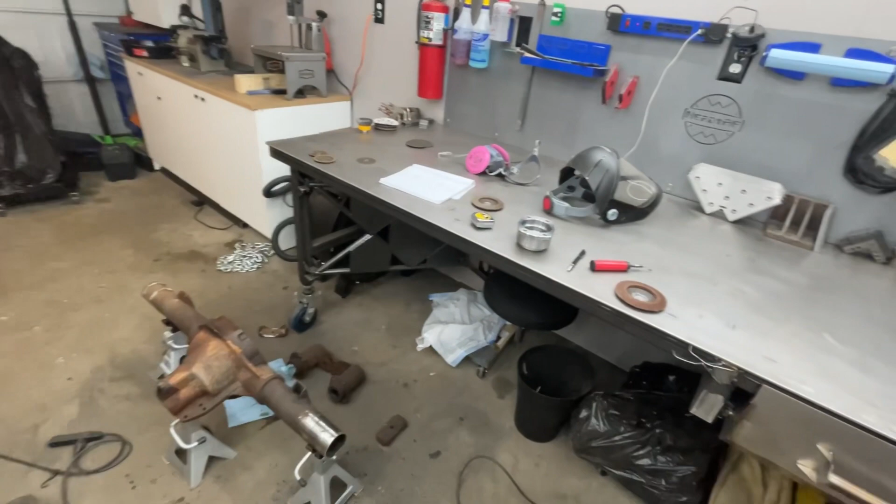Episode 18 here, and we got some cutting, grinding, and more cutting on a dirty, rusty, old rear axle. I got my Ford 8.8 right here. It's in shambles. I got my housing ends, and I also placed the order for my Tin Soldier small tire 4-link brackets, so we can get this rear end built. Really, once I'm done cutting and getting everything straight, I get the brackets on, weld it together, it's ready to rock. Then I just got to order the spool and some axles to stick in it, and I can get it sitting in the car.

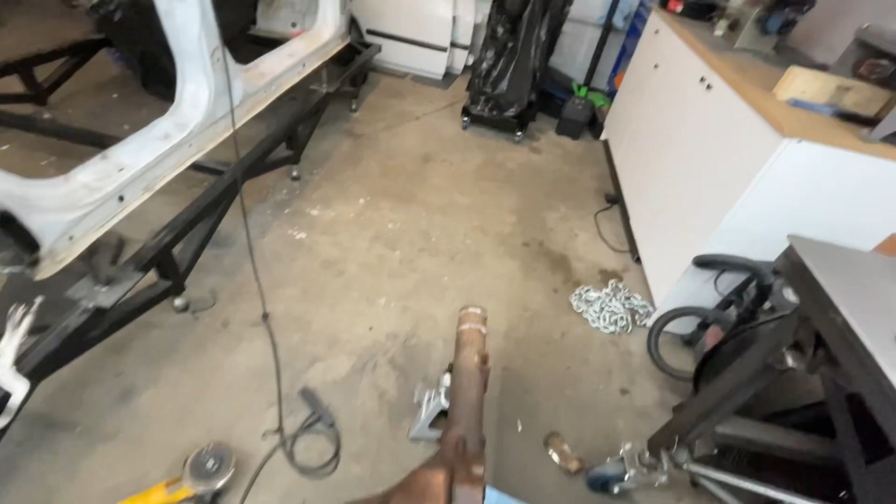So I want to give a breakdown of what I did. In the car, I had put both tires where I wanted them, spaced from side to side. I was pretty happy with it, but I ended up deciding to favor tucking them under the car some more, going up underneath the car. As much as it pains me to do that, because it won't look as good as something super flush, I think in the long run it will be better.

There's also a couple benefits from it. One being that it makes the axle actually a little bit lighter, because there's a lot of metal when you account for the tube and the axle. It's making it just a teeny bit lighter. It also makes it so much easier to get the wheels and tires off. Being a drag and drive car, doing maintenance, pulling the wheels and tires off and putting street tires on is something I'll be doing. During a drag and drive event, you're doing it multiple times, at least twice a day, when you get there and when you leave. And driving it on the street at home, I'll be doing the same thing, putting miles on it and having fun. So I decided to favor tucking it up underneath the car.

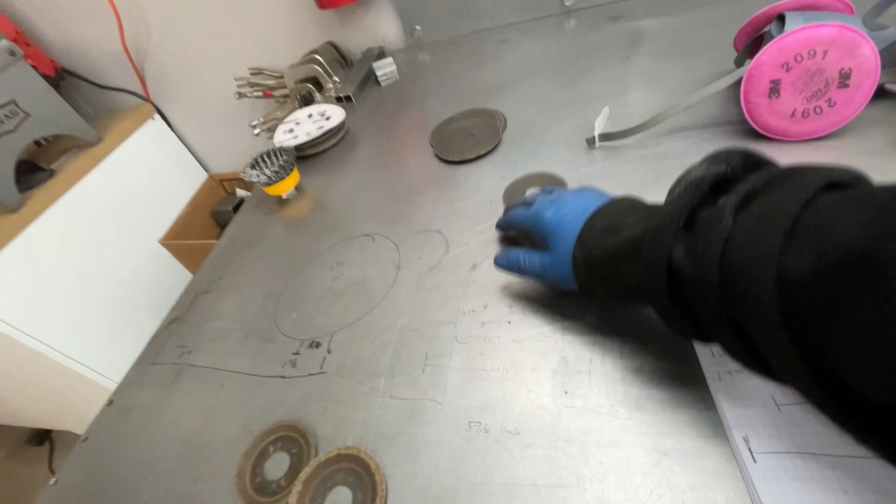I took all those measurements and made sure they were the same number. If you measure at 4 points on the wheel across to the other wheel, all four numbers should be the same distance, which tells you the wheels are perfectly parallel with no twist or turn. I was happy where they were spaced. I took a measurement from the inside of the hub to the inside of the hub on those two wheels—they're 5.5-inch backspace wheels. Taking that measurement inside to inside, I ended up deciding to go with a 40-inch axle, from hub to hub. So just to give you a breakdown of what I've got going on here, it's a 40-inch axle.

This was the rough distance between the two tires. So I got roughly 30.5 inches between the two tires, and then from hub to hub was 40 inches.

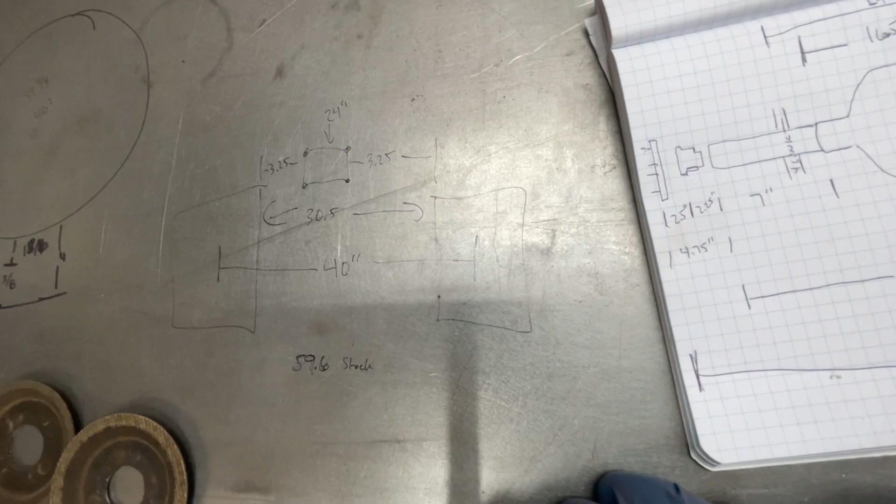Then I knew I was going to have to cut a ton off this thing. I think stock was like 59 or 56 inches, so it was a ton. I knew I was cutting a minimum of like 18 inches off this thing.

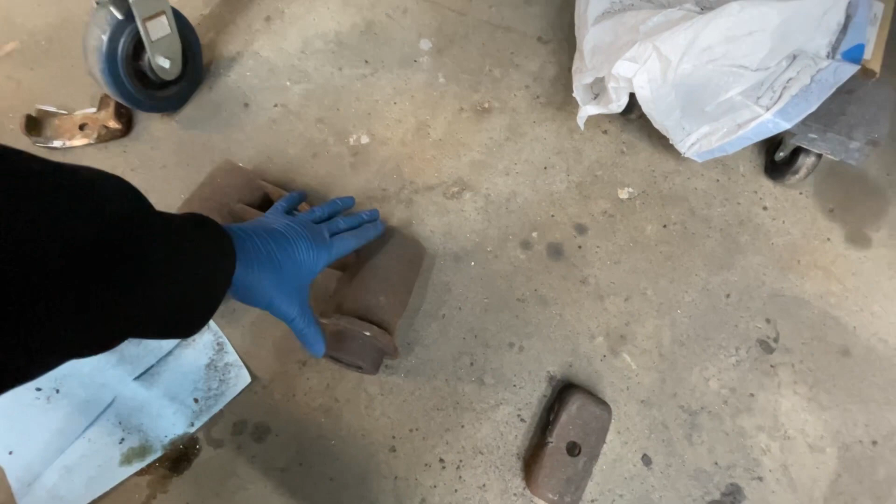What I decided to do is pick a spot just past these shock brackets, which is only like a 6-inch piece, maybe 7 inches tops. So I just whacked it off there, so it's less metal I have to clean. Then I started digging at it, cutting these brackets off. I cut both those brackets off and ground this one.

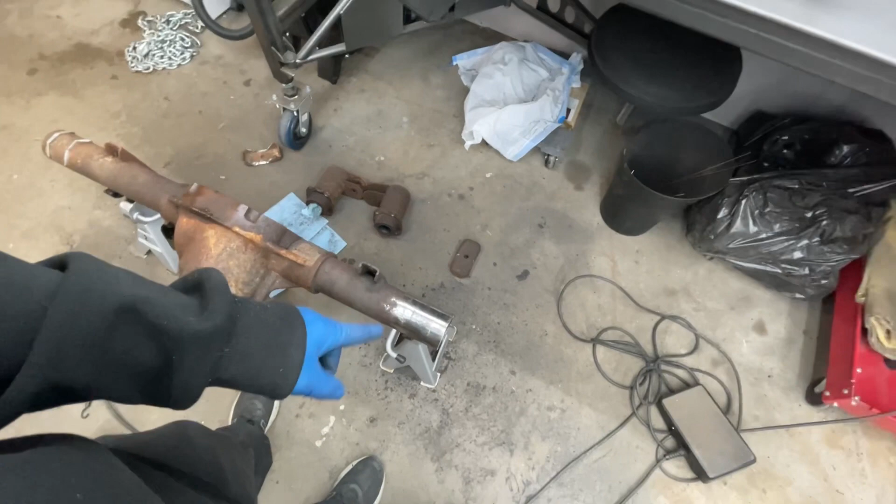And then I was sitting there looking at it and thought I should probably measure this thing, because I may be doing a lot of cutting and grinding for no reason at all. And that's exactly what I ended up doing. So I took some measurements.

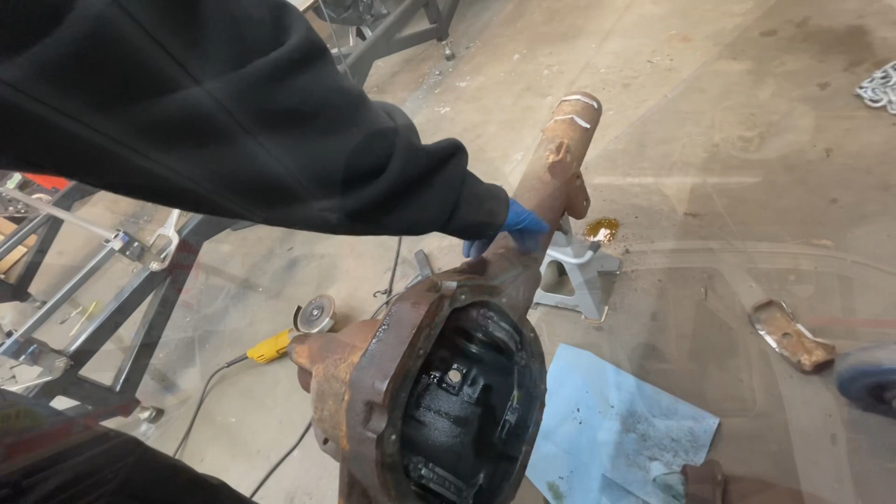From this cast area to this cast area, basically the full width of the center section, not the tube. So up against this shoulder to up against this shoulder. It should be a relatively centered spot on the housing.

What you can do too is measure from the cap to the outside, and then this cap to the outside, to kind of make sure the diff is going to be square in there. But that doesn't necessarily mean exactly where the diff's going to be either. So really you're just looking for a reference point to measure off of tube length wise. So going from here to here, that gives you a good spot to measure out to here.

So I always measure on the same plane. When I go to mark this axle, I'll measure it at the same spot up here out this way, just in case there's some weird casting shift - I wouldn't measure from over here, I measure in the same spot out to here. And obviously before I cut, I would measure from here all the way across to the other side. That's how I go about figuring out how long the tubes need to be.

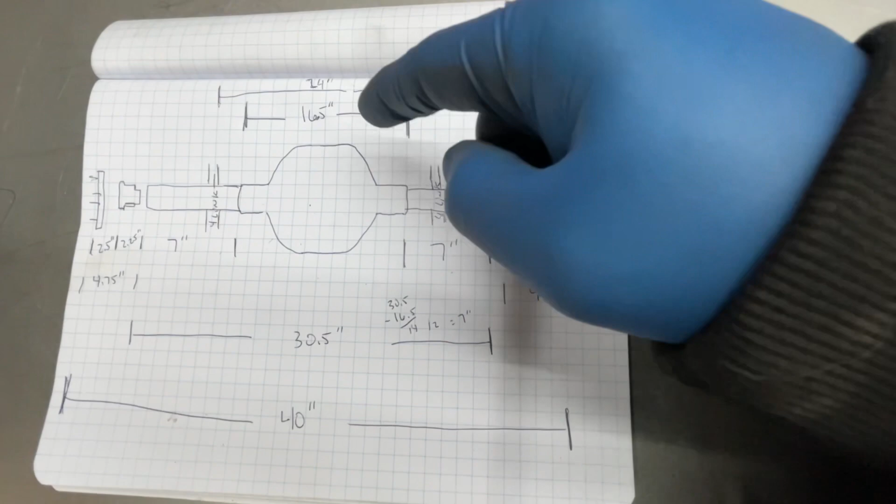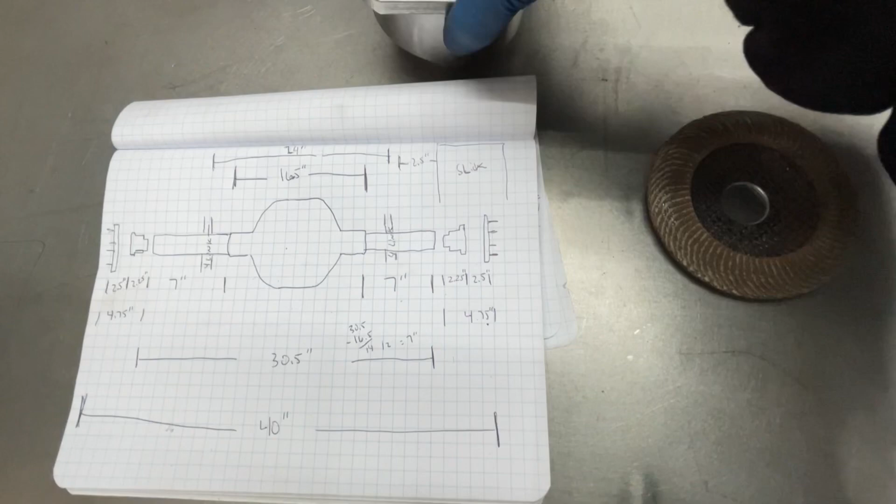So I measured 16.5 inches on the housing length. Then, from the axle flange, where your wheel bolts up, to the front of this - so from where the wheel bolts up to the front of this - the standard for these axles is 2.5 inches. I think most 9 inches and most 8.8s are 2.5 inches.

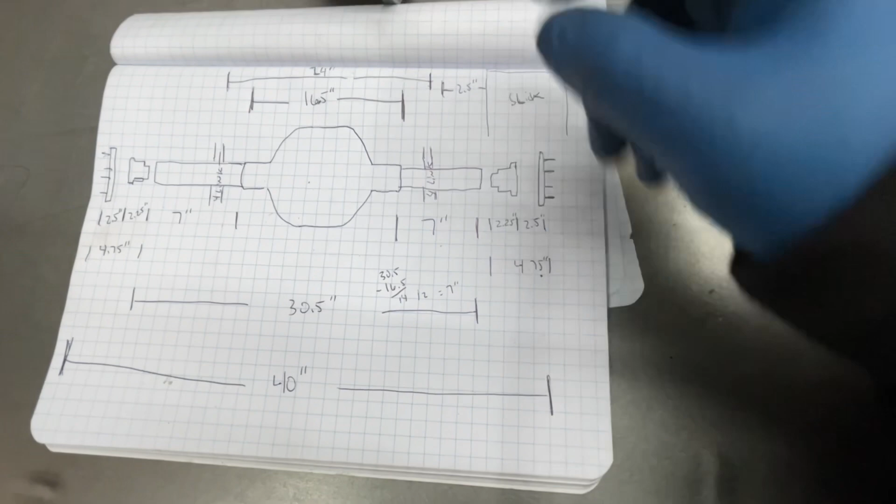So when you buy aftermarket axles, everybody pretty much sells them at 2.5 inches. So that's 2.5 inches. And then I stuck this in there to see exactly where it sat, and gave a measurement from here to the axle tube. So from this outside flange where my thumb is to the axle tube, because the chamfer itself kind of sticks on the inside there. I took that measurement - that was 2.25.

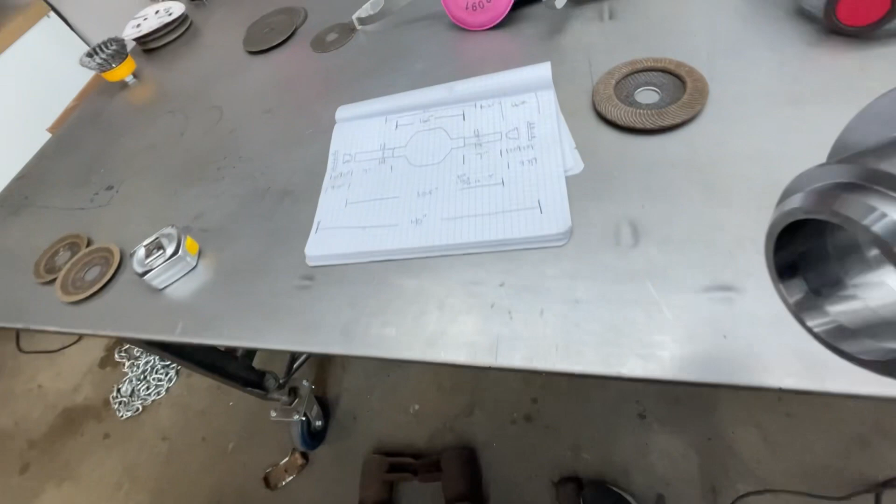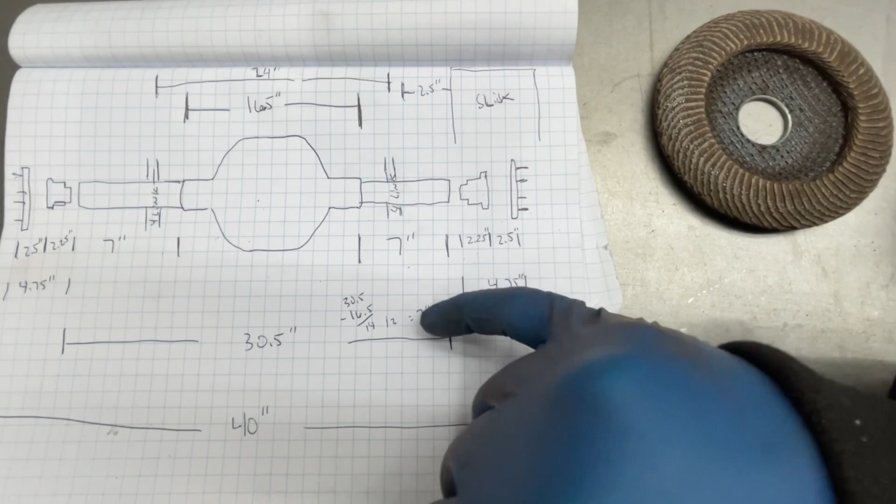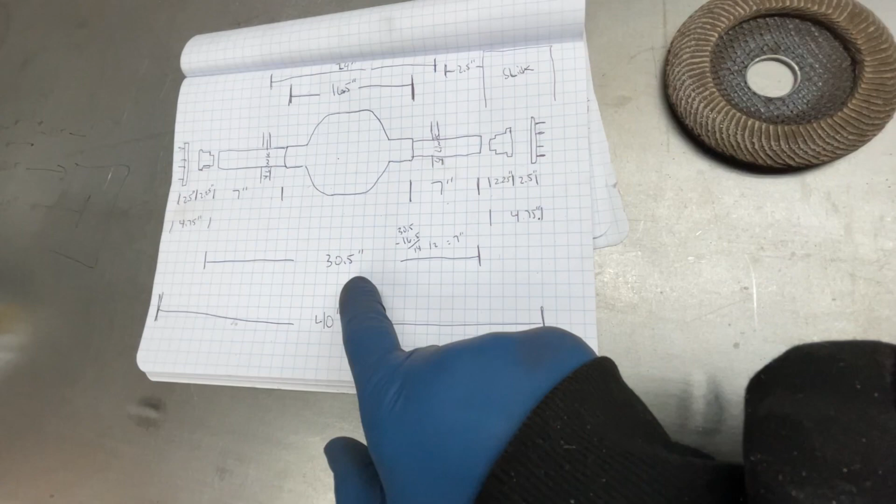All right, so after some back mathing: 2.5 plus 2.25 is 4.75, times 2, subtract it from my 40 inches overall, and that gives me 30.5. Then you take that 30.5, subtract the 16.5, gets 14 inches, divide that by 2, and that gives you 7-inch tubes on each side. So if I was to mark 7-inch tubes and measure it, I should get 30.5. And then I know if I add this and this to it, it would give me my 40 inches.

So that is how I know exactly where I'm going to cut. And that is why I messed up and wasted a bunch of time by grinding these, because if you measure 7 inches, I didn't need to grind those. I could have just cut it. Oh well, so the last hour or more of me grinding, I didn't need to do.

That's why you always measure certain things first. Sometimes you can cut it off and it's just less you have to clean up, less you'll have to grind. I should have known better that I was probably going to cut more off than the 6-7 inches I already did, but I just got a little rambunctious with cutting brackets off and cleaning it up.

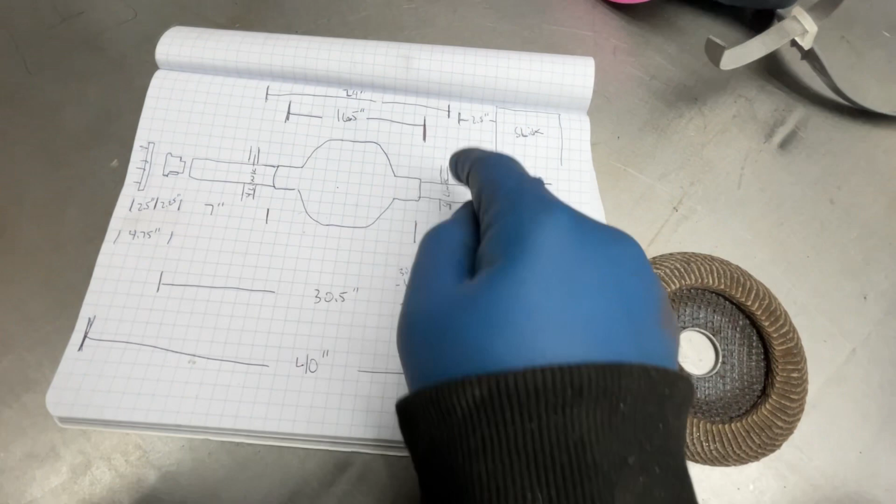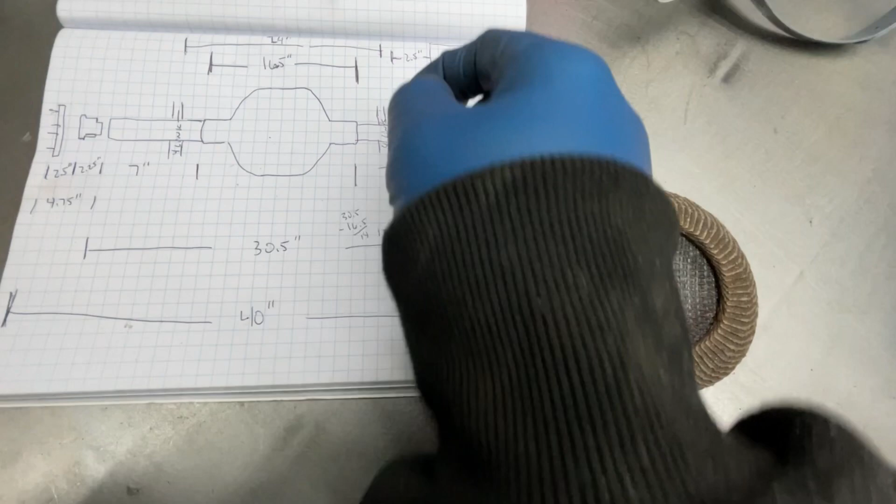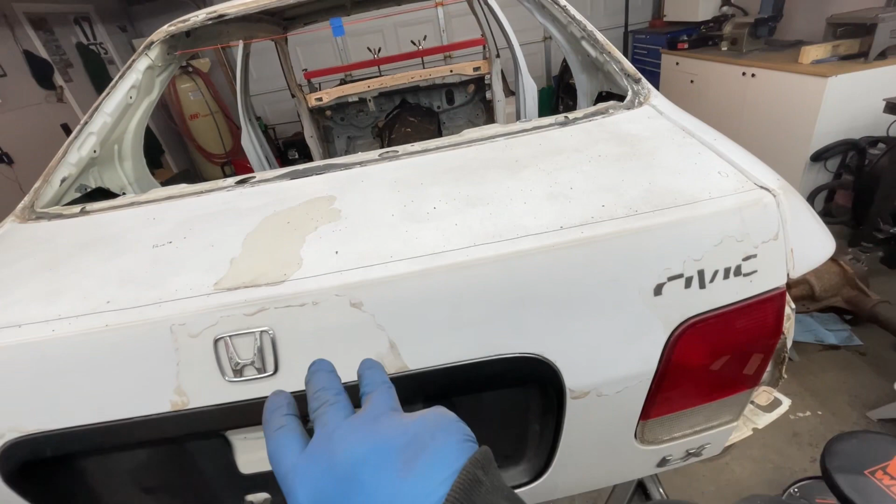It happens. Another thing I did, I know I'm going to do a 24-inch rear section, so my 4-link bars are going to be at 24 inches on center. So the distance between my 4-link bars, center to center, is going to be 24 inches. That way the shocks and the shock tab will be right in the center of that upper bar, because the shock tab will come off of the rear structure on the back of the car. Oh, I got the trunk on. So I'll have the rear structure that comes back over the axle, and the center of those two bars is where the shock will bolt and then go down to the 4 links. So everything will be 24 inches on center.

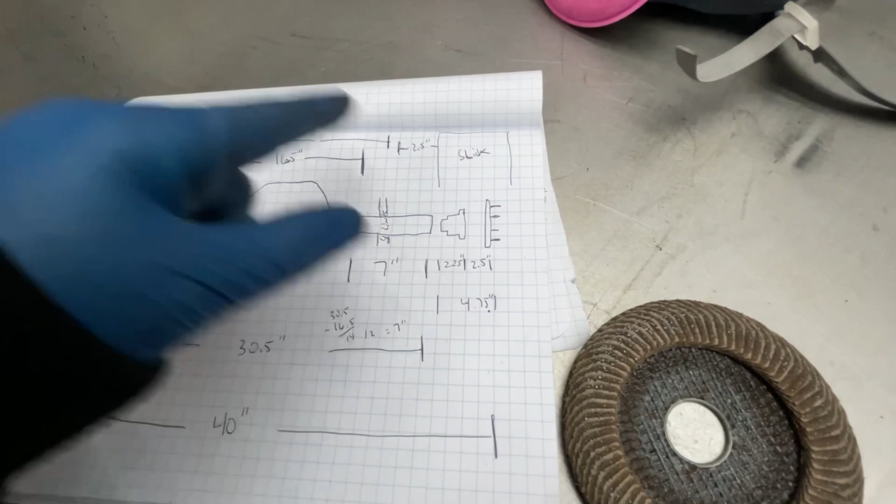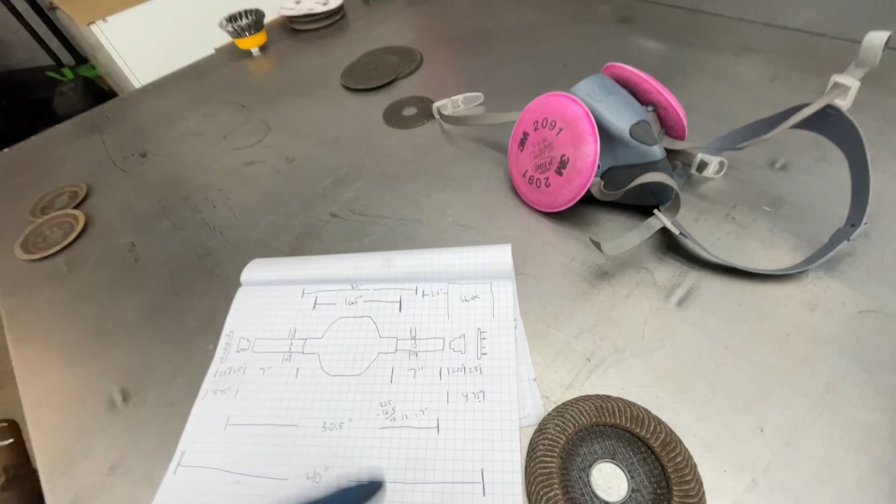Doing that math, just to double check here, I'd roughly have 2.5 inches by figuring out the back spacing. It's a 5.5 inch back space. You add all that stuff together, subtract everything, and you'll end up with 2.5 inches from the outside of the wheel to the center section, which is fine. I figured I'd roughly have anywhere between 2 and 3 inches on the inside of the tire, which is plenty. All right, that was a little long-winded, but I hope that gives you guys an explanation of where I'm going with the axle.

I'm going to go ahead and get the rest of the brackets cut off, the other two brackets I should say. I'm not going to bother grinding that one. These two will have to get cut off and ground, so I will cut those off and grind them.

And then I'm going to grind, wire wheel, get this thing as clean as possible. Get like 6 cans of brake clean, bathe this thing, clean it up the best I can, and get ready to do some fabrication. I'll probably make a little jig stand for it so I can set it up on my welding bench, because the 4-link bars will have some bracing. I'll have to do some front bracing, coming off the tubes to the center section and then back, so there'll be some front bracing there.

And then the 4-link bar, this is the bottom of it, so the front bracing will actually go to the top. It'll come off the bar, go to the top, and then go from the top to over there. And then the 4-link will have a bar that runs down here, welds to this, and then to the other 4-link plate, so it'll come across like that. And then here somewhere, I will have to integrate a wishbone mount. I believe it's got to go to the bottom of these axles typically. I'll have to do more research on where to mount the wishbone, but the wishbone will be something that'll get welded in after I got my 4-link bars set and all that stuff. So I'm not in a big super hurry to get the wishbone in.